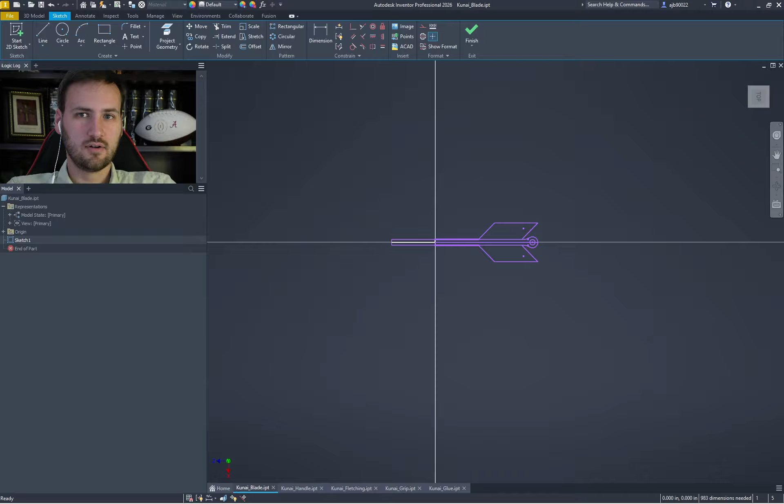We're going to continue our sketch before moving on to 3D modeling, just to get an idea of how we want this to look. Right now we have the wrappings, the fletching, and the integrated hole here. Let's go ahead and get rid of this.

This, I think, would be great for storage. You can have a bunch on you and just tear one off with a simple tug, or latch it onto a chain or tether and whip it around.

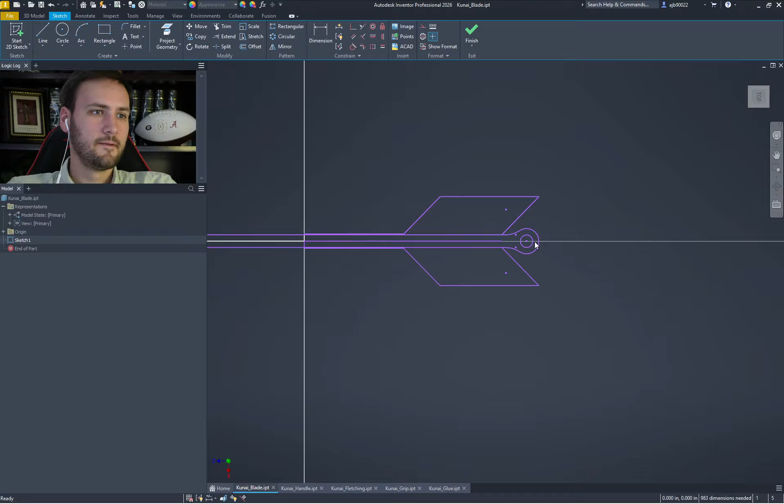One thing we've squared away is this is somewhat of a throwaway weapon. It's not one you'd want to put a lot of effort into, since it's a jack of all trades, master of none type of thing. So you wouldn't want to put too much into it.

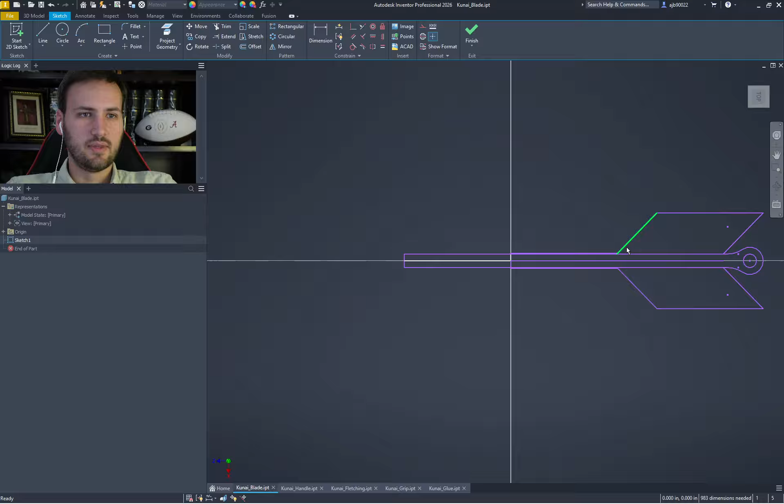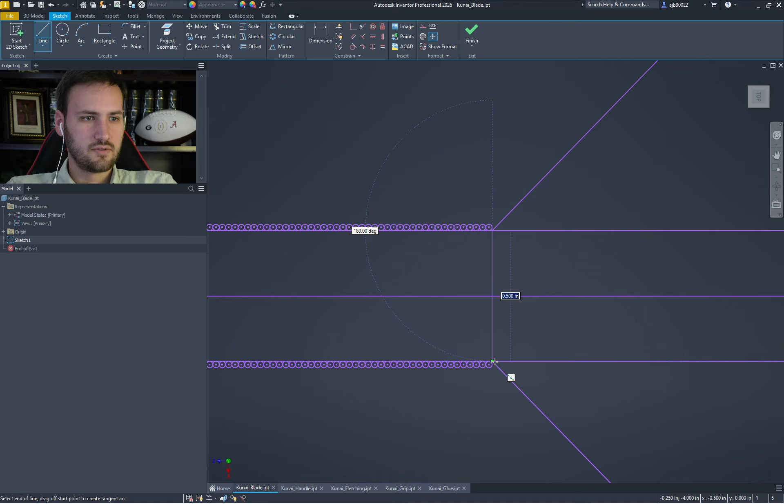Now that we've allowed ourselves some wiggle room, let's see - should this be 0.5? So this is the tail, this is the head. I'm going to give us another 0.5 inches to work with on each side so it's balanced. Let's cut that there, and then just mirror this over.

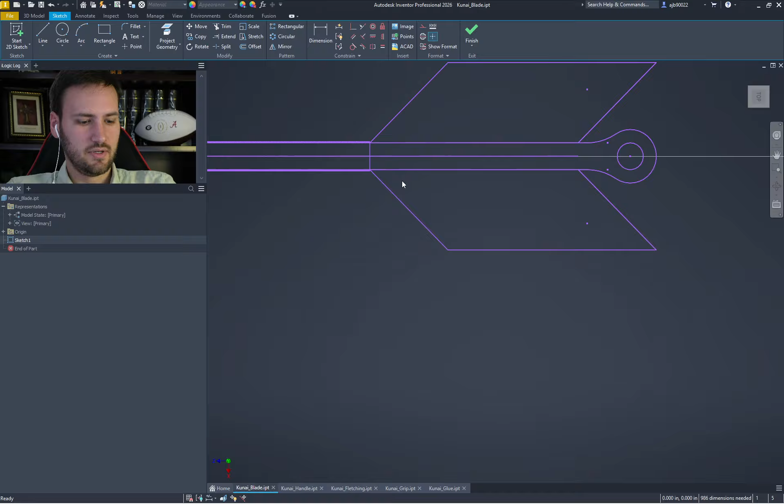This is just a quick and dirty means of getting rid of portions you don't need anymore. Let's go ahead and cut that out of the way.

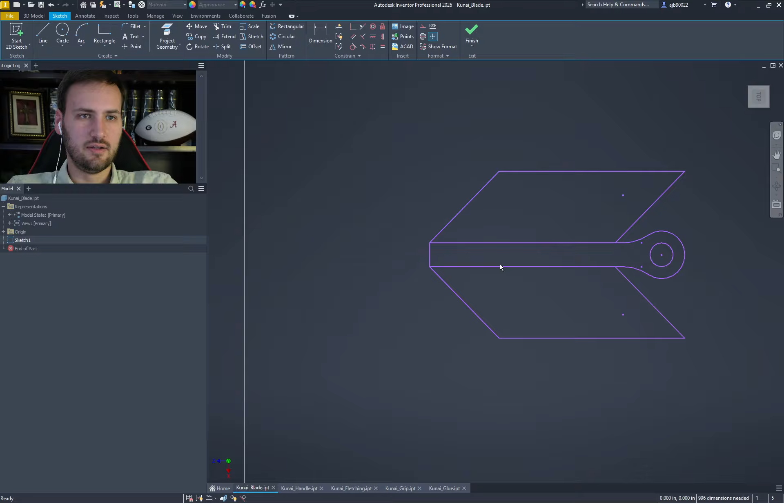Now we've got a tail portion here, which appears solid enough. We have some bindings here, just like the fletching. It would make sense that you'd use the same cordage for the handle as for the fletching, so we can incorporate that into the design.

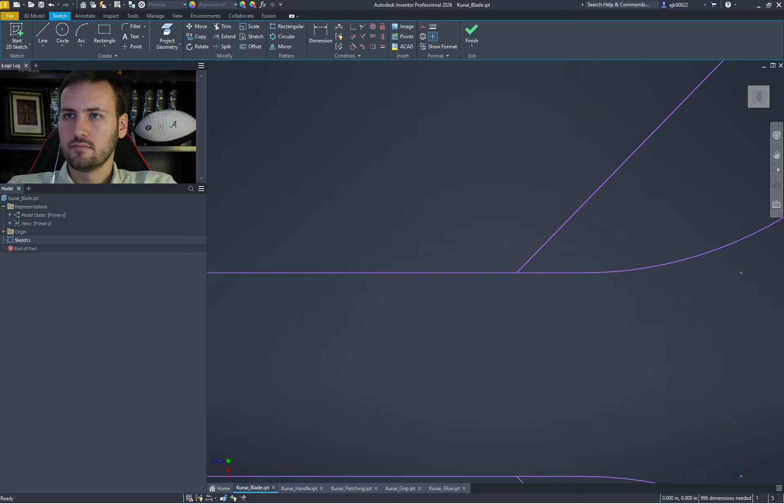I wish they had the size listed. I guess if we know the thickness, we can gauge everything else.

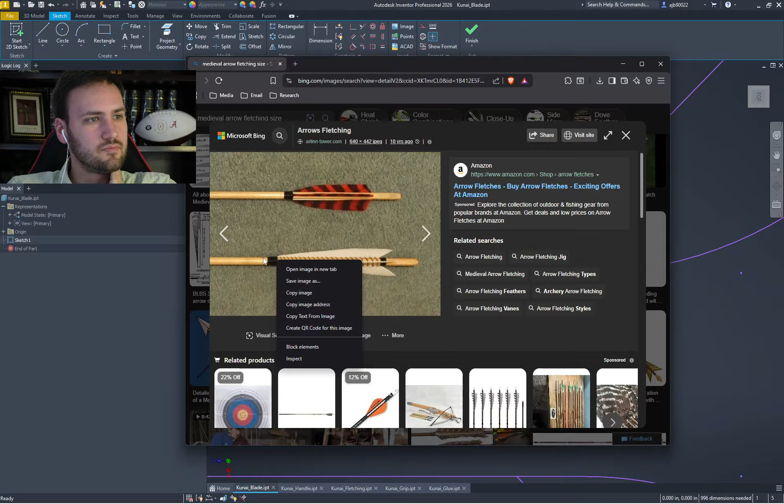Okay, so how big is this wrapping here? This is almost as thick as the shaft itself. So if I have half an inch of shaft, it might be a good idea to have half an inch on either side then.

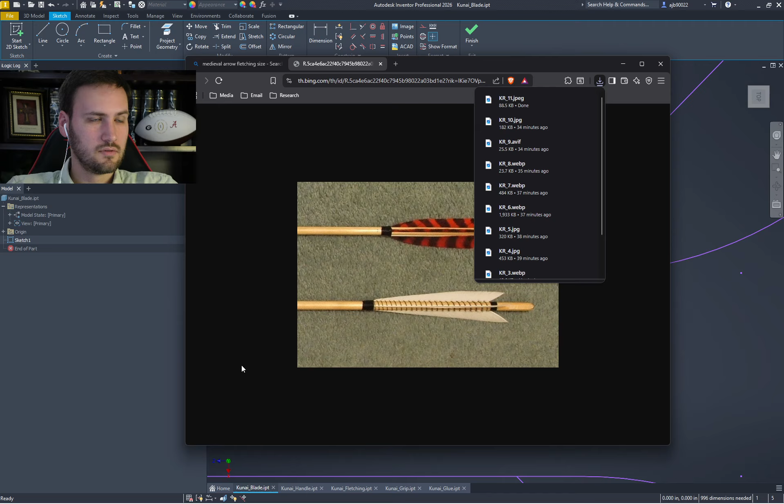Let's go ahead and add this to our references. Seven. All right, come on - go back to where I want you to go. There we go.

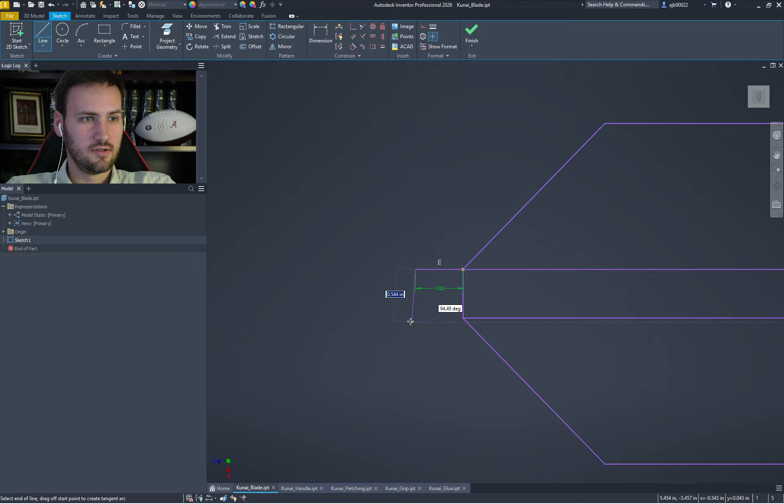Now that means we must account for a bulge here, which could also double as the ending of this right here. So it seems to be a significant amount of wrapping.

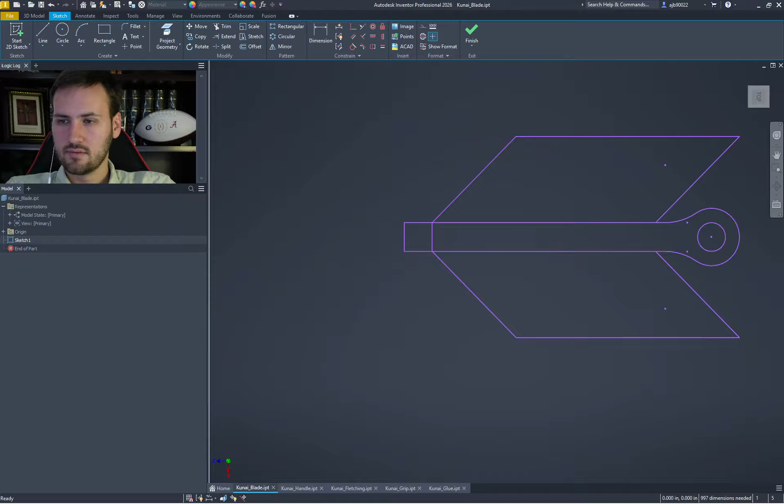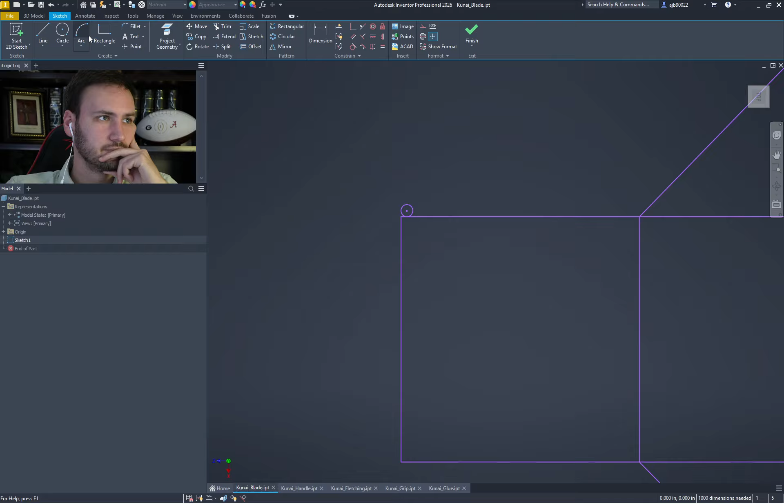Let's see. So if we go 0.025 like the rest of the grip, let's do this, let's do a quick arc. 0.065 - will this be a decent arc? Yeah, I suppose so.

But let's perhaps make this 3 high, at 0.025. Oh, maybe 3 high is too much. Or maybe not - maybe it's just right.

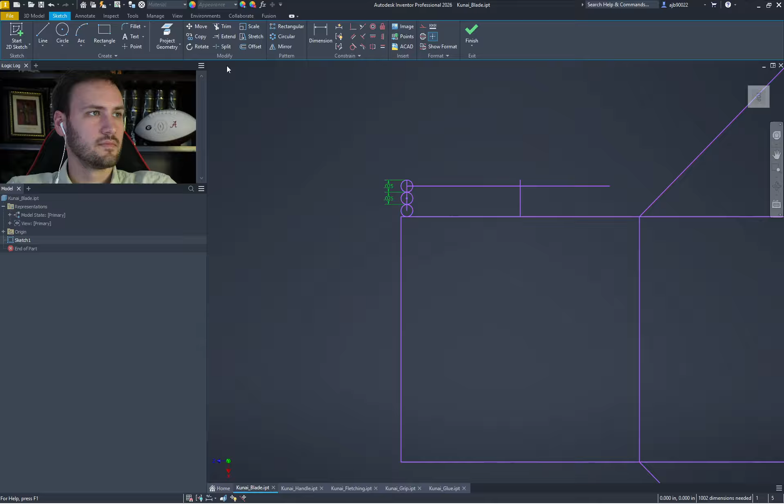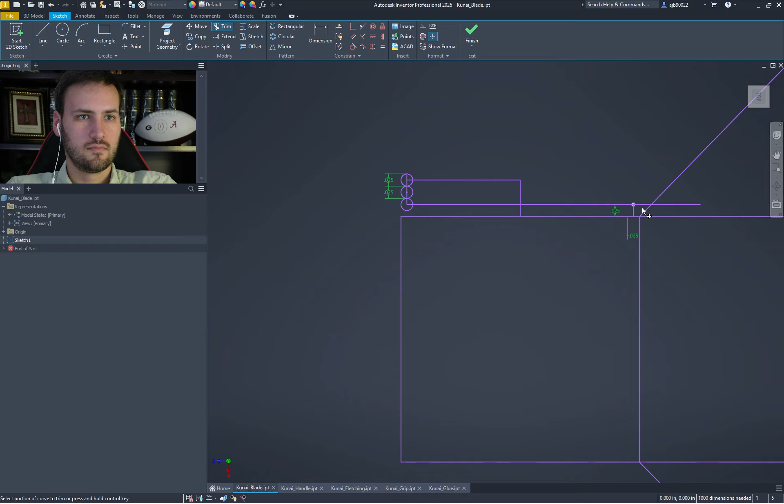Cut that, cut that - let's do the arc. Oh whoops, need to bring this over here. Yeah, come on, there we go. Get rid of this, get rid of that.

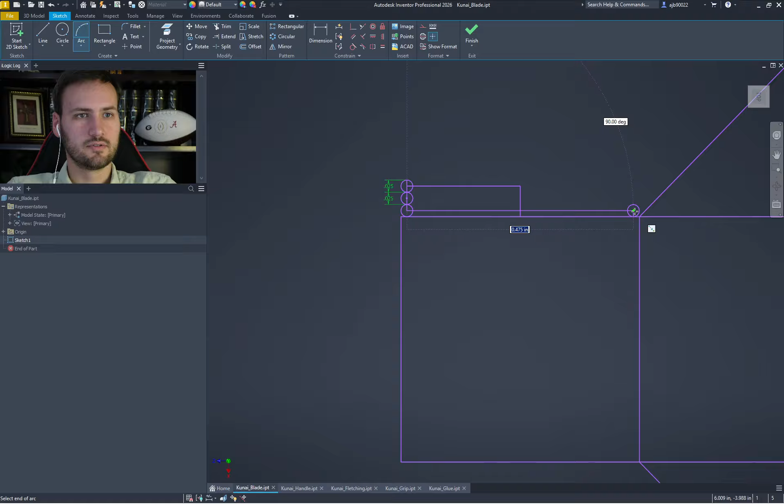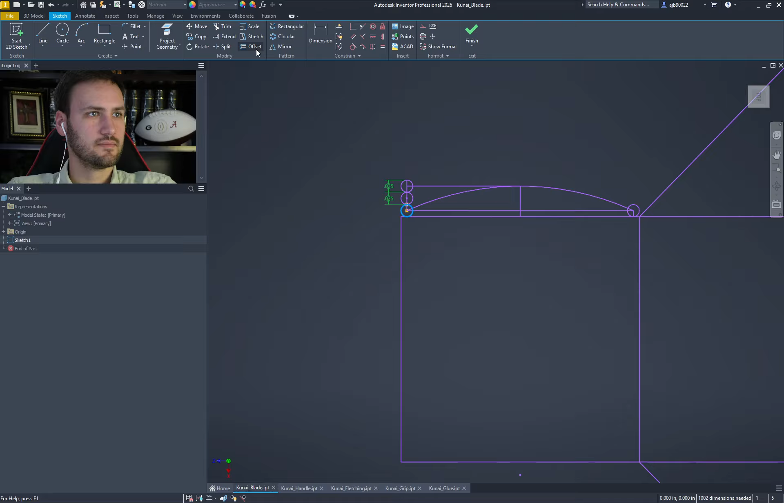All right, 0.025 - let's get this arc established. So let's see here - take this, array it. Oh, wrong direction. So 10 can fit there.

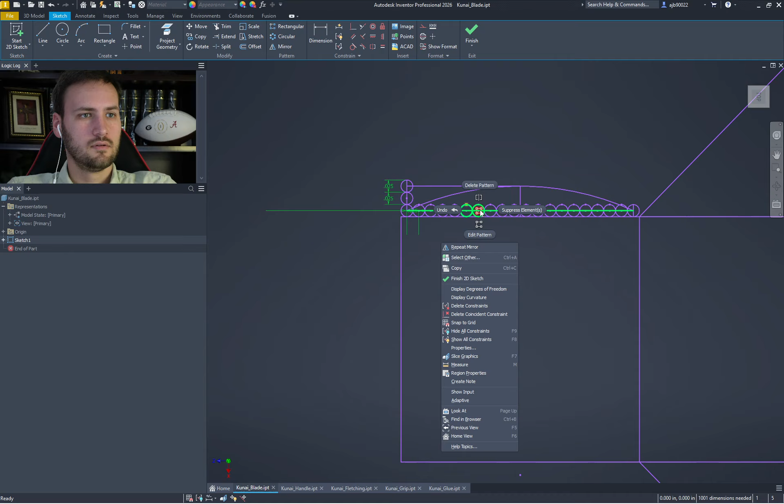All right, let's go ahead and mirror this in - don't need that anymore. Mirror, apply, complete pattern. Get rid of this, get rid of that.

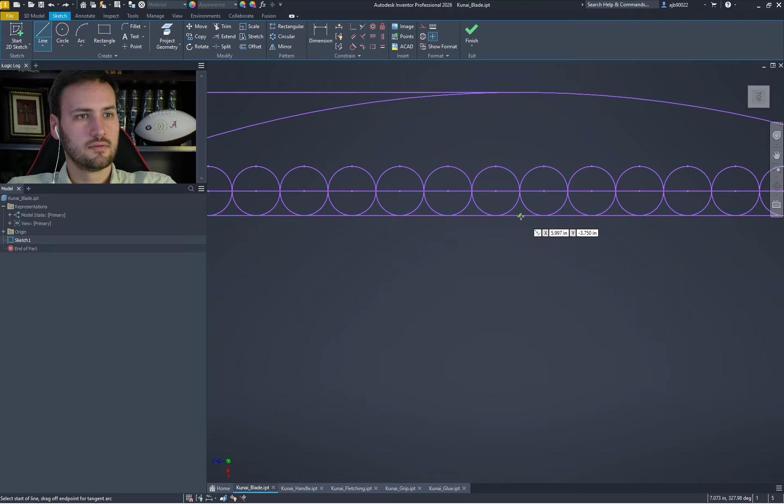Let's zoom in here real quick. All right, now what I'm going to do is use a tangent here, and do that to define some constraints. The constraints just limit what it could do.

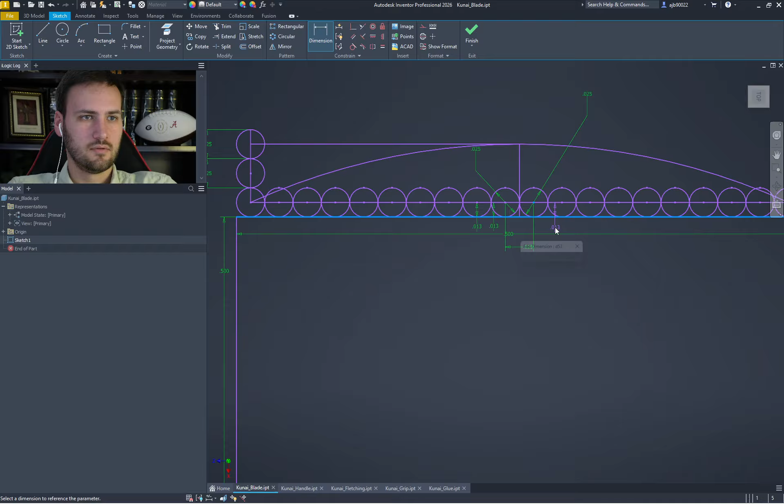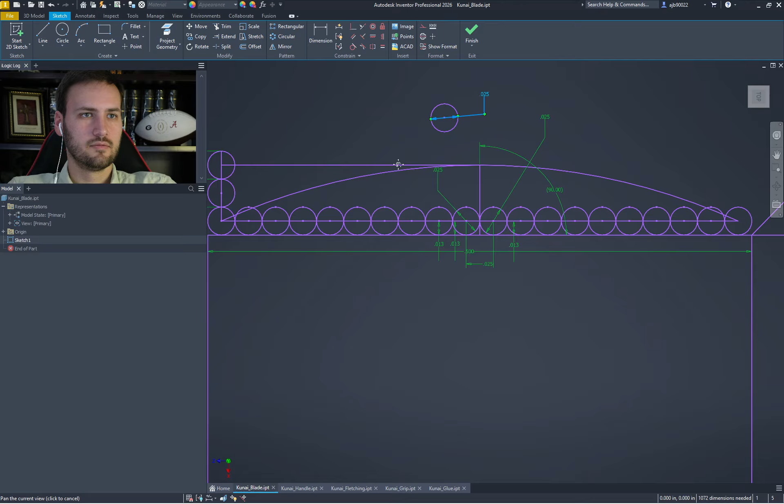I'm just preventing it from doing anything I don't want it to do. So constrain this, constrain that, accept - alright, it should be enough then. 0.025 - why is that so far away?

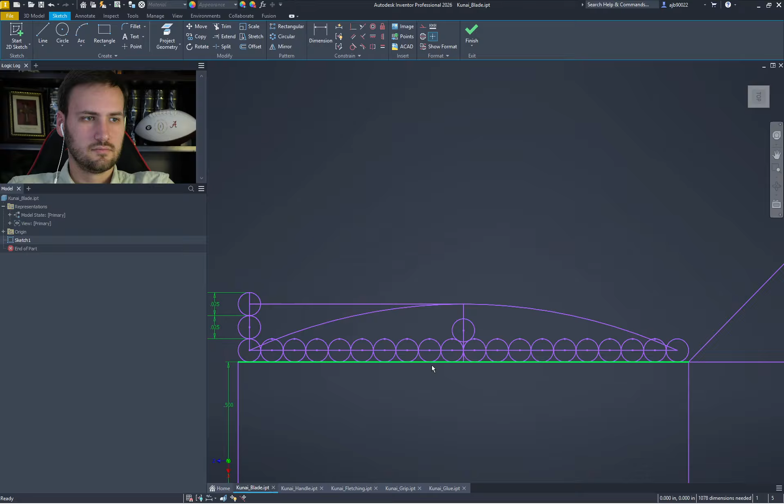There we go. So now what I'm going to do is see if I can attach this to this one here, and attach that one to this one here. Perfect. Now I can get rid of everything else. And these little points are annoying, so get rid of those.

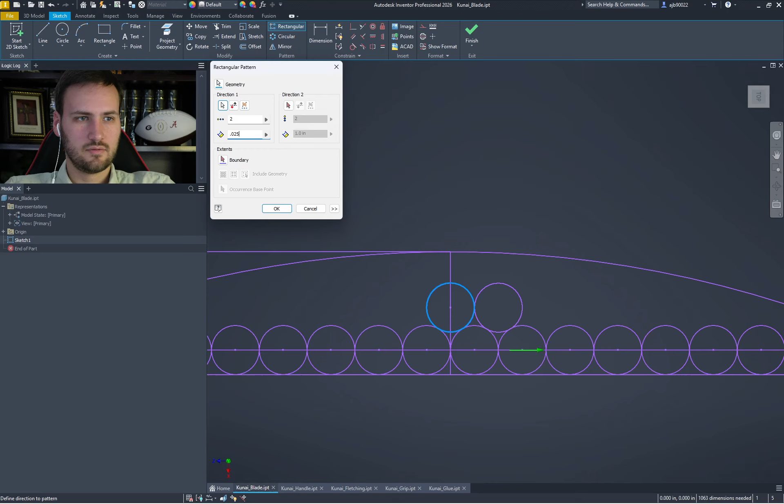So now what I could do is array this - pick a direction, go that way. Alright, so now 6, 7 - let's go 8. Will 9 work? Nope, let's go 8.

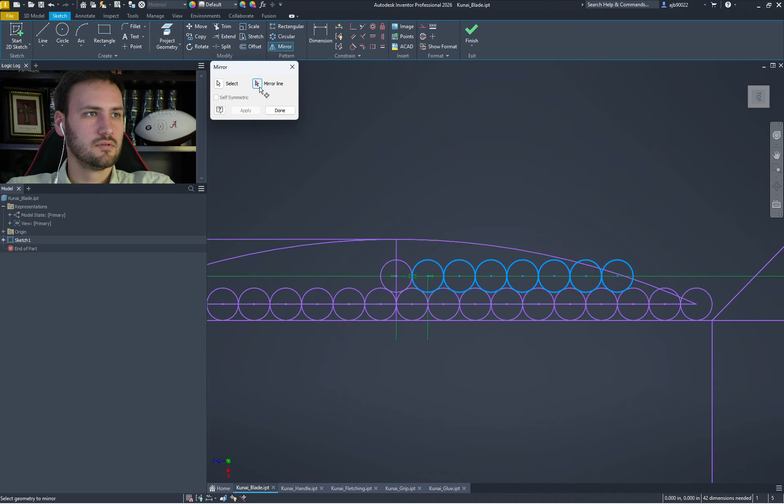Alright, let's mirror these over. Basically, the only reason I'm mirroring them over is to get rid of the pattern constraints. Take this, mirror it over. When I do a 3D model, it'd actually be wrapped like a screw, so I won't have to worry about this as much.

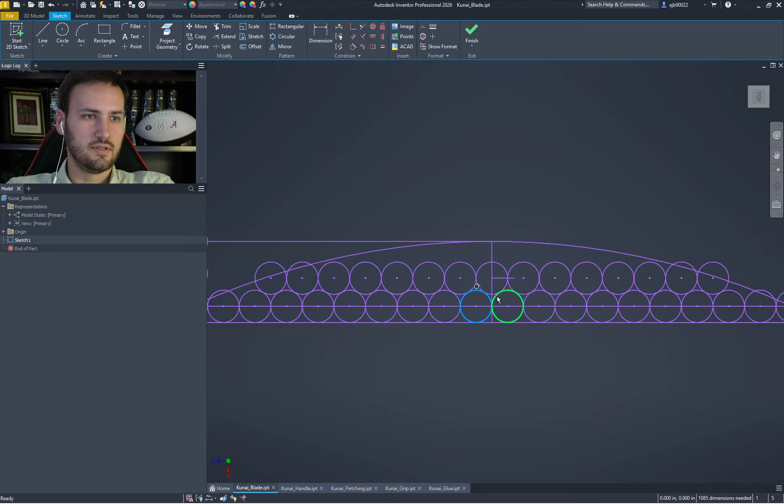Alright, so now to start off the next one, just go ahead and flip these over. Take this, take that, mirror. Alright, that looks good enough.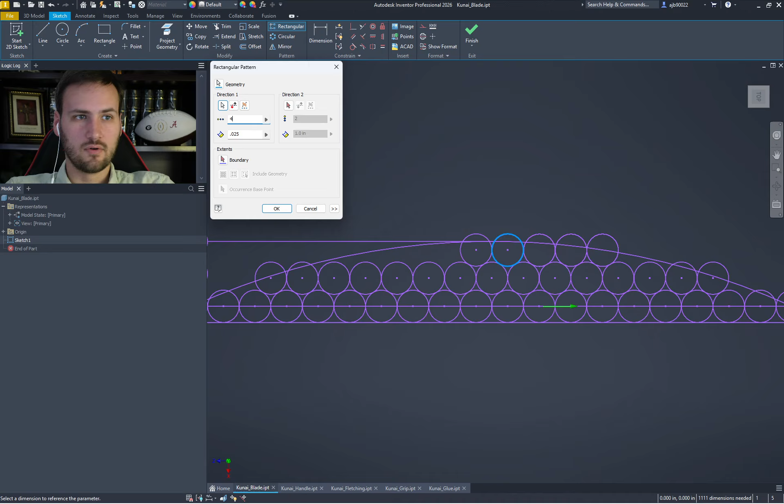Now let's not mirror, let's do rectangular. It's 5 to start, 5 - so it looks like 4 is the lucky number. Let's go ahead and flip this over.

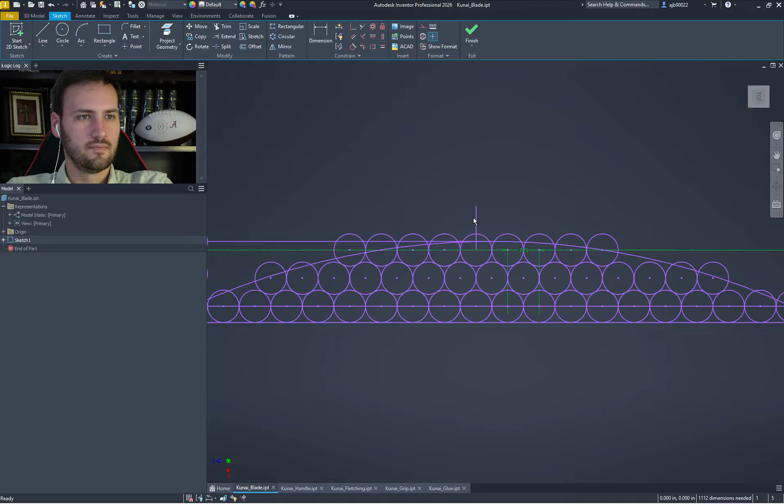Why is that off? Oh, okay, that's why. So that's the median there. Alright, that should be good enough.

So I can get rid of this now, get rid of that. Why can I not get rid of this constraint? Oh, okay, that is why.

Now I know I don't like patterns sometimes. Pattern. Mirror. Should be double there. Alright.

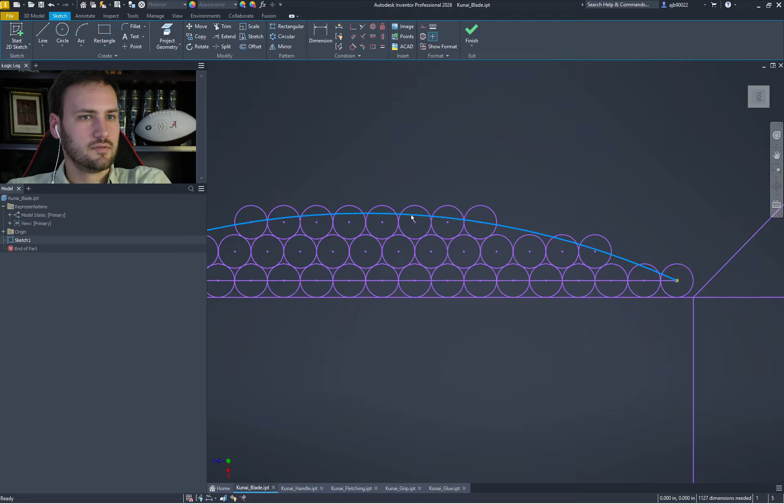Get rid of these. Get rid of the arc now, don't need it anymore. And that'll, so to speak, represent the extra wrapping there. So now this actually needs to grow.

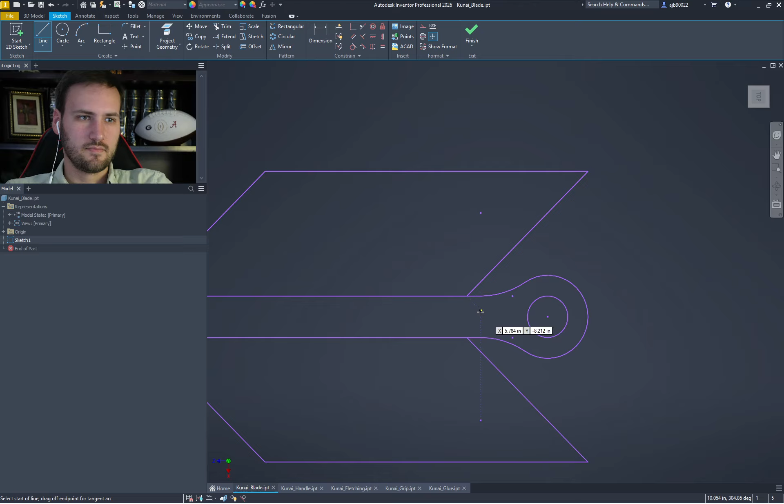See how much we got here. So take that, just cut this here. Let's go ahead and move this out of the way. Let's pick that as our base point.

Oops, what did we grab? What is this? These legacy constraints. Shouldn't be anything preventing me from moving this.

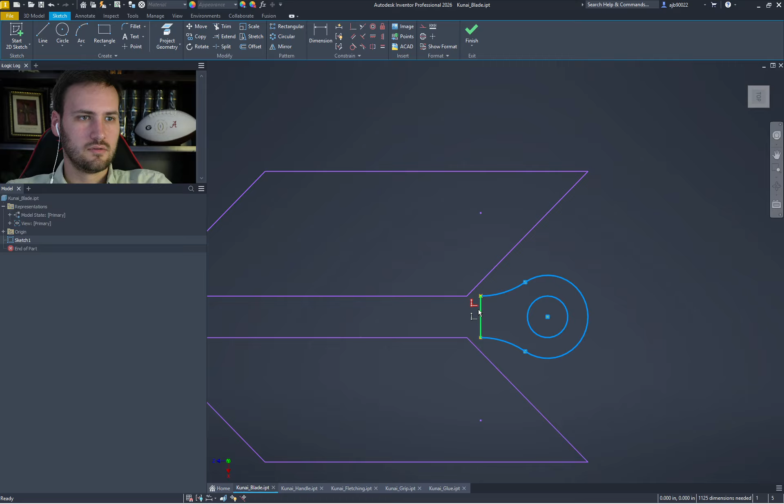Alright, let's go ahead and grab these. So this shouldn't grab anything else. There we go, all right, perfect.

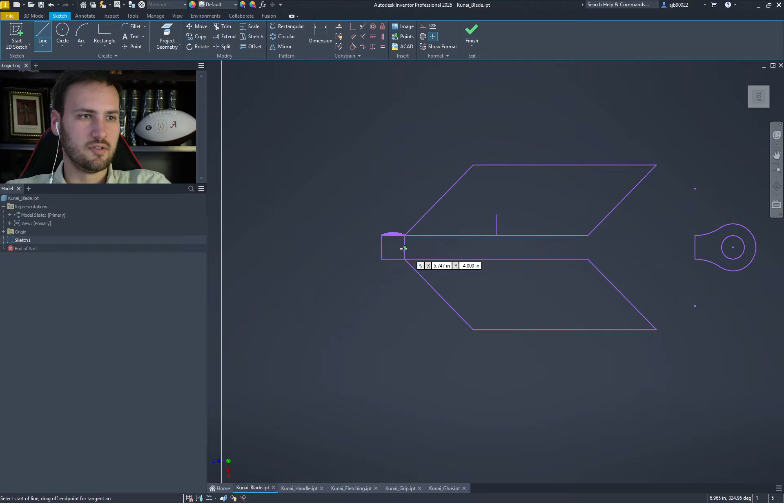Now let's go ahead and mirror this over. I guess first let's go ahead and mirror it to the bottom part. Mirror, mirror select, line, apply, deselect. Should be 2 lines here. There we go. Now let's go ahead and mirror this over here.

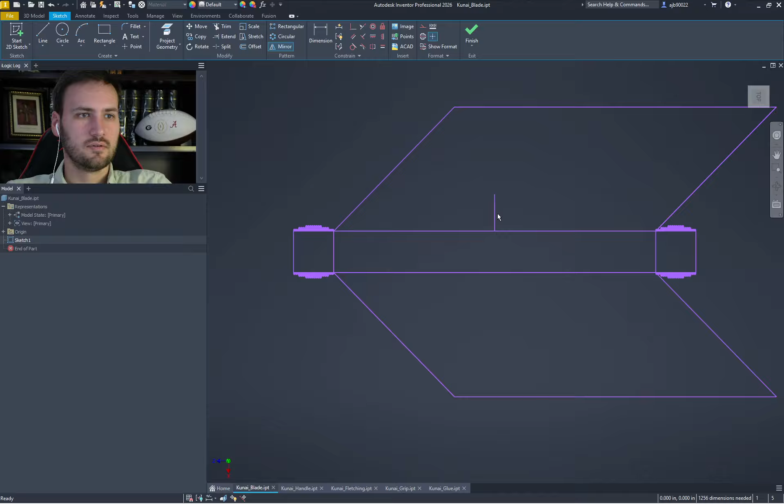So, I guess similar to the anime now, this will act as your grip stop, as well as your fletching stops. Take this again, move it. But we do want this.

When does this terminate? 1.329. Let's do 1.375, yeah, just to keep it nice and pretty. Okay, there we go.

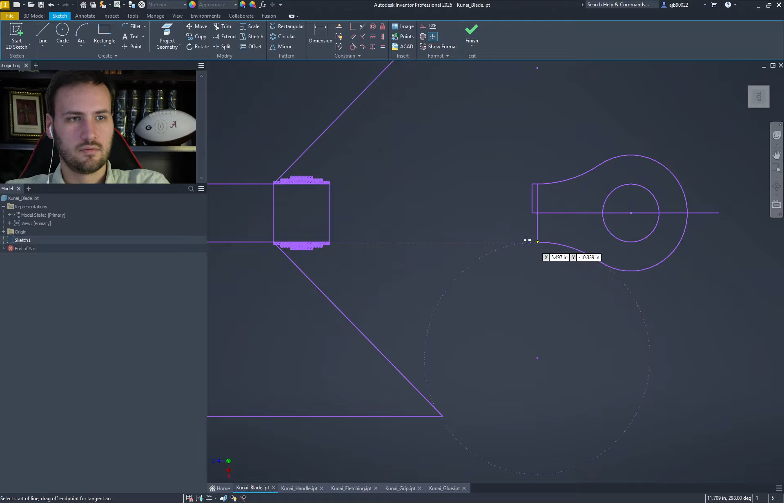90 degrees, there we go. Get rid of that extra constraint. There we go.

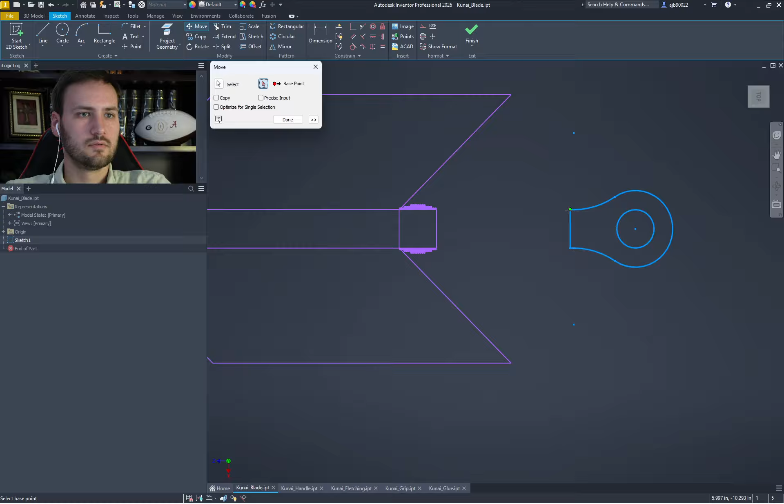Now let's go ahead and slap this back on. Move. There we go. Now we can keep that there.

Well, there's an extra here, isn't there? Yes, there is. That'd be a good idea to keep that back on and just get rid of that. There we go, in case we want to separate it again.

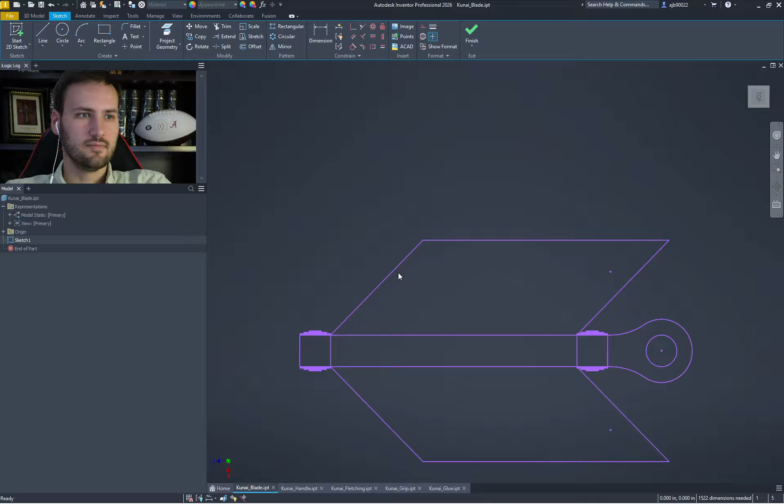Alright, so we're slowly adding more and more detail to this. I guess just that should be good. So now let's go ahead and move this back.

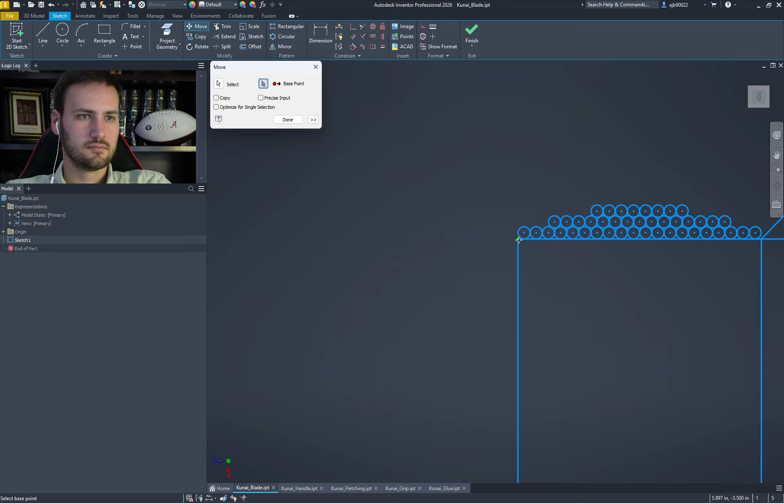Alright, so there's your stops. Creates a nice place for your hand to rest, in a sense. Now, should be another one in the front.

So let's go ahead and mirror this stop over. I guess you could call it a stop block, because it really is just a block. There we go, get rid of that. Perfect, let's get rid of those.

Prevent them from overlapping. So now what do we have? So here to here, what is that? 9.5 inches.

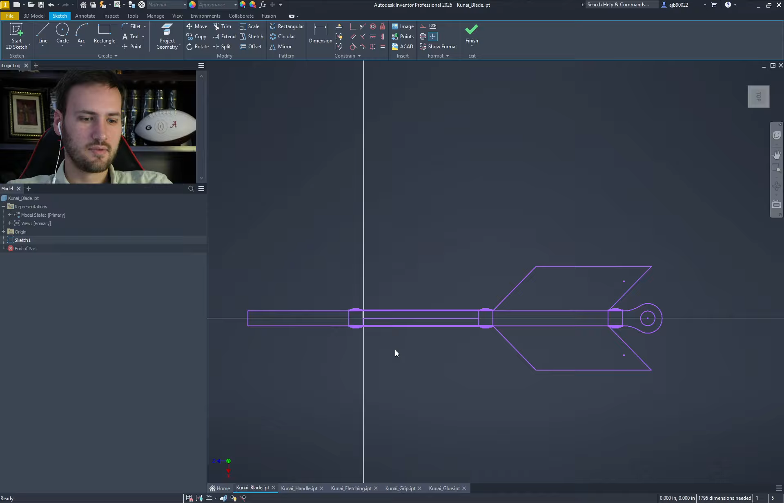So I guess by default these are significantly larger than the Kunai in Naruto, but I think it would behave much, much better. And to me, it's like I want to get the function of the Kunai more so than just staying true to the original style.

Let's see, how big is this? 5.875. What would the blade look like if it was the same size? So that looks pretty good. So, okay, we're gonna treat that as our size.

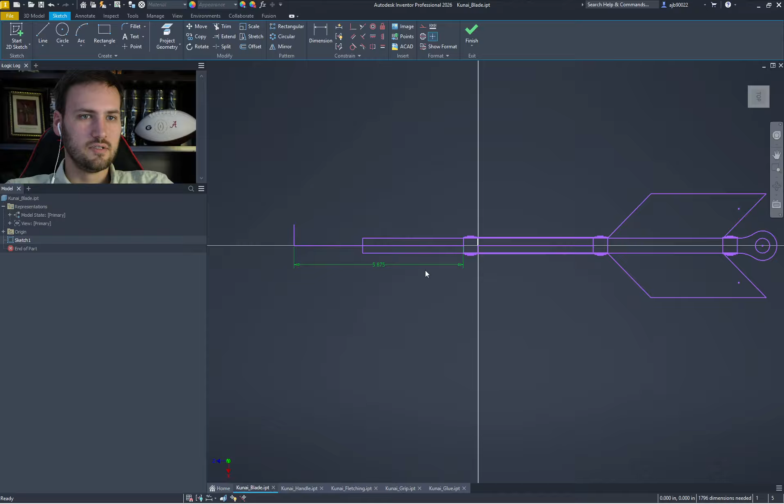Now I'm curious, how big will this be? 16 inches. It's a big boy, but would be functional as a dagger as well as a, I guess, as a throwing weapon too.

And are much more akin to the Plumbata in that sense. So let's zoom out of that. I guess just to keep track of that, what we can do is this.

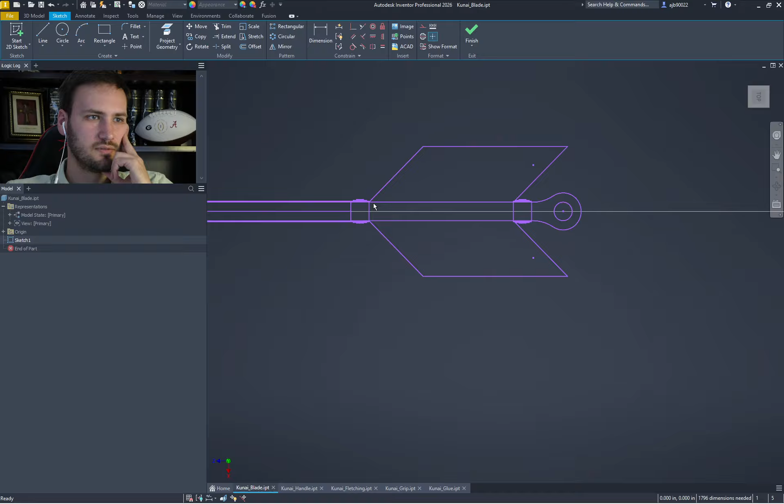Let's do this. What's 45 degrees off that, just so we keep track? Is it 45 degrees, or would you say it's shallower than that?

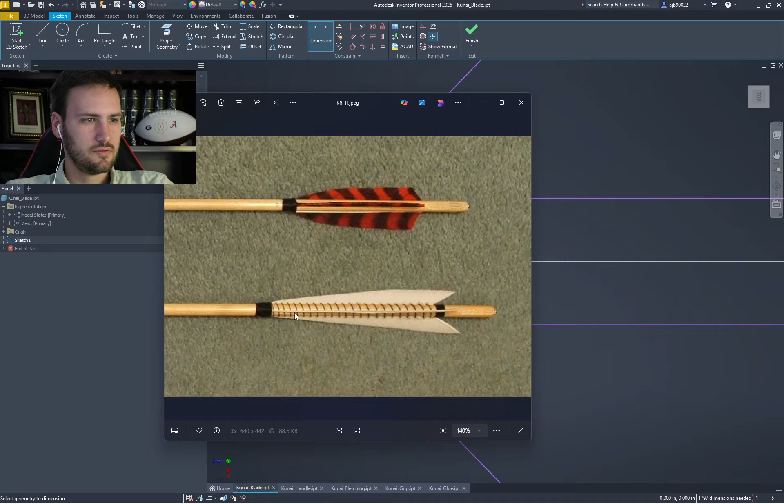Should have gotten, there we go. Looks like it's more so 15 degrees. Yeah, it looks more like it. Maybe 20 or 25, or even just something arbitrary for all we know.

Cut that there. 0.25. Whoops, wrong one. 0.5, there we go.

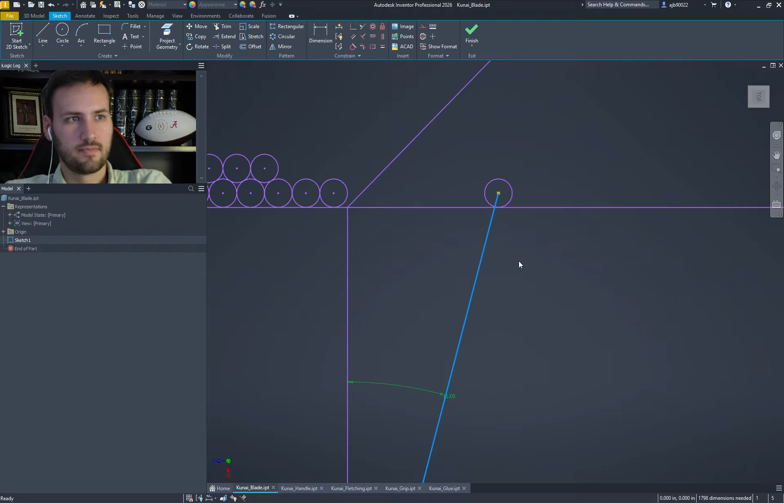So how far apart is this? Don't really care to do the math on that, so let's just do this. Mirror, apply.

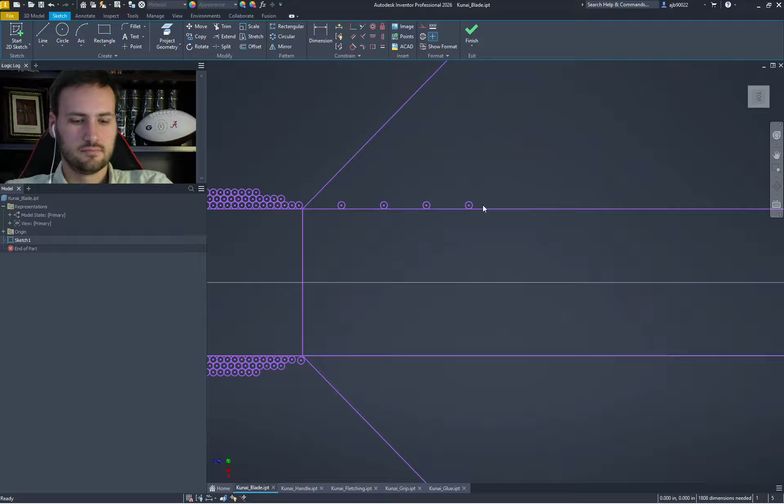All right, there we go. Sooner or later this will make it all the way across. All right, let's see here. It looks like the next one will be the last one.

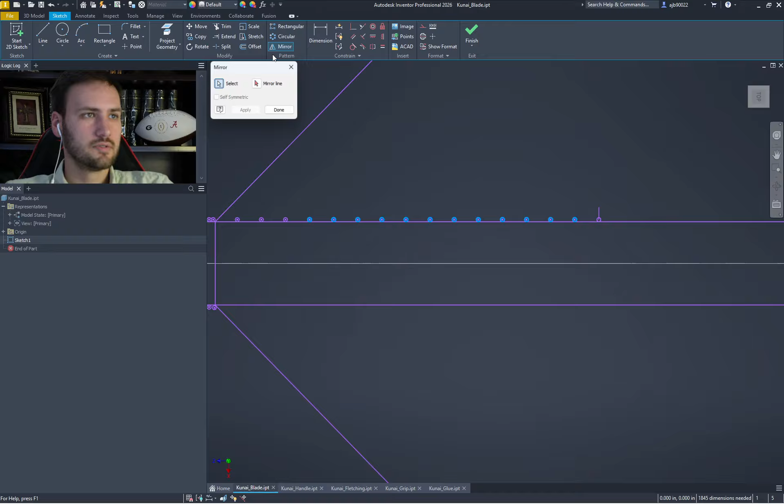I don't want to overdo it, so I want to get rid of any doubles. And there are doubles. There we go.

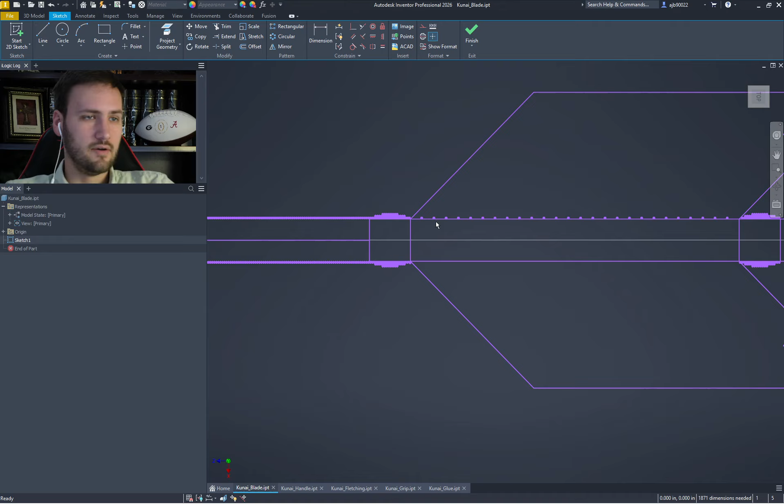Now to do the bottom. Stick this, mirror. Get rid of that, all right.

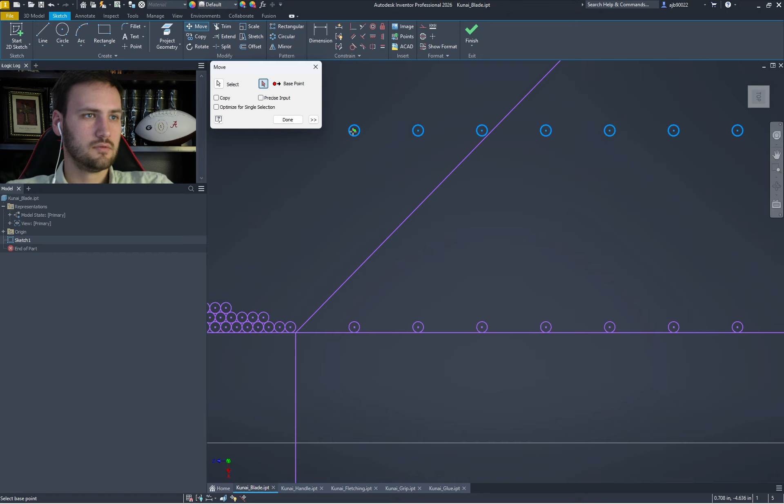So now, so that's 15. Should be able to just move. Why is it off?

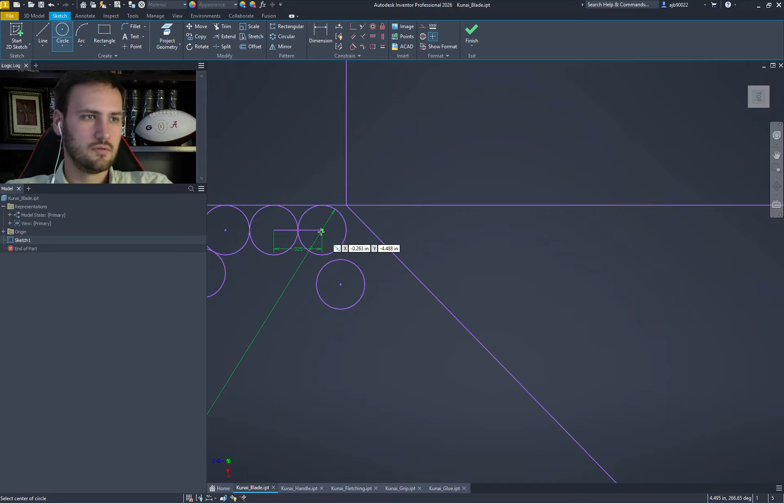Serious? I accidentally moved it. Does that mean the rest of it's off? It's just representation anyway for now.

All right. Let's go ahead and just finish this up real quick, then we'll move on.

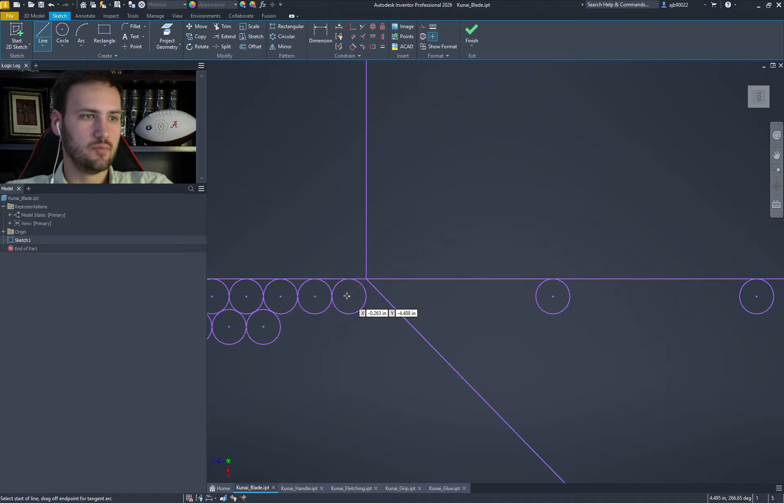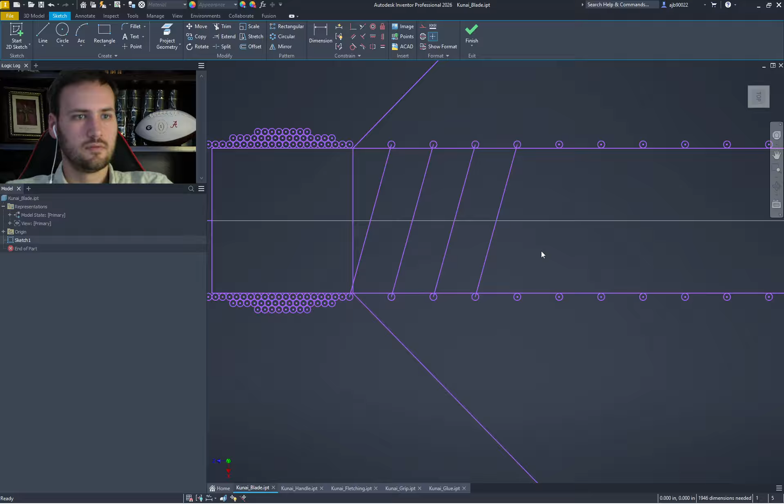Okay, let's see here, speed this up a bit. Feel like I missed one. Yep. There you go.

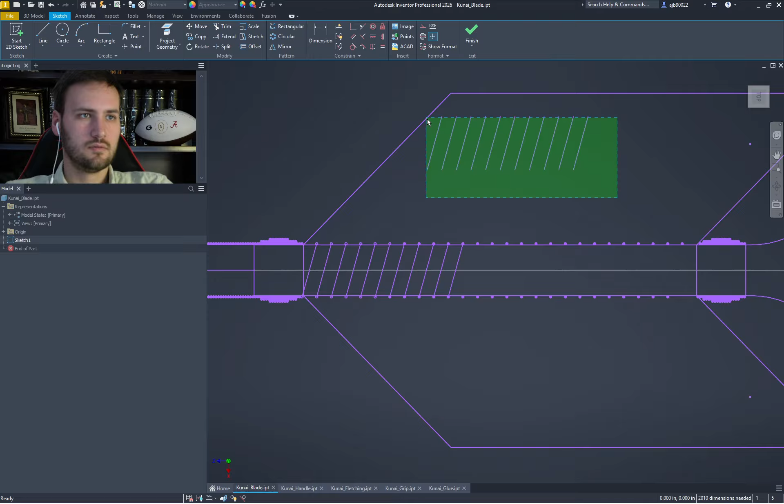Let's copy it over here. Move. There we go. Alright, just 4 more.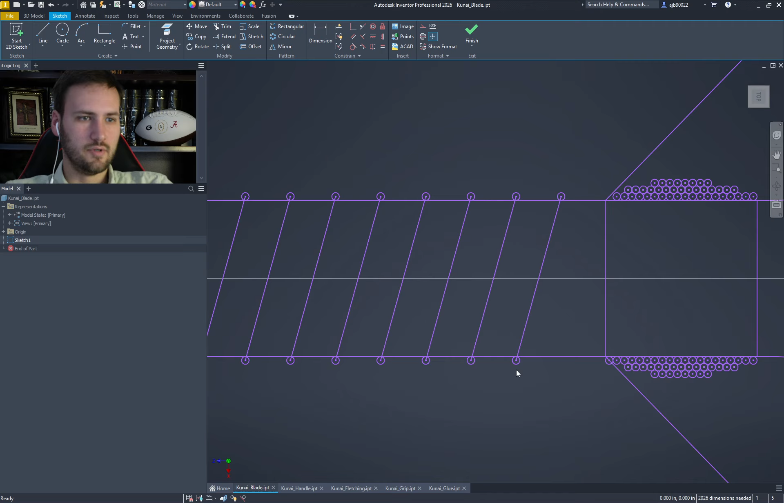There we go, should be 1 here. Is this straight down? Yeah, it is. Okay.

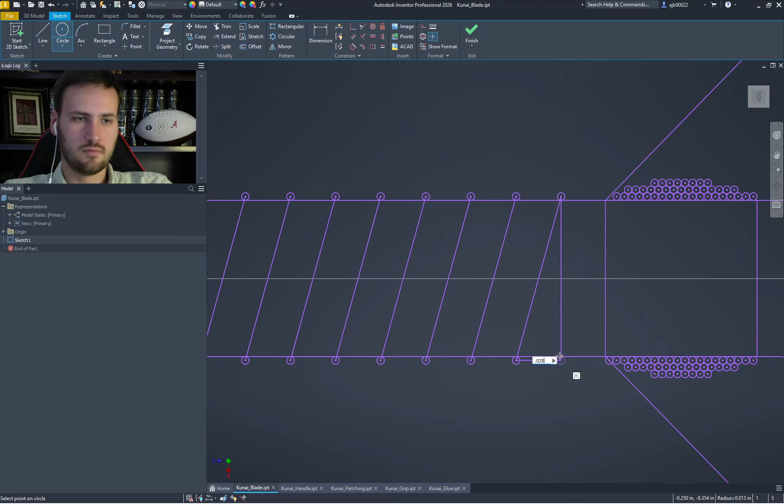I should have just mirrored that over last time, but whatever. Alright. That's gonna be annoying, but whatever. It's good enough.

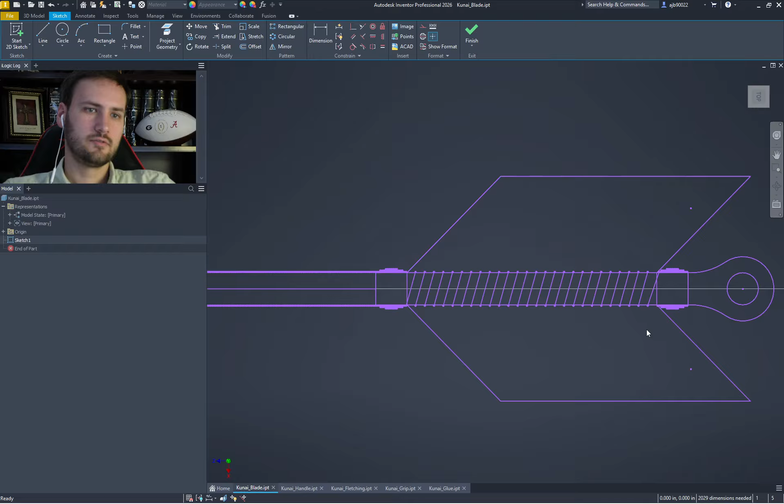Alright, so now let's leave it there for now, and we'll come back and finish the blade next. And I think I've been forgetting to save.